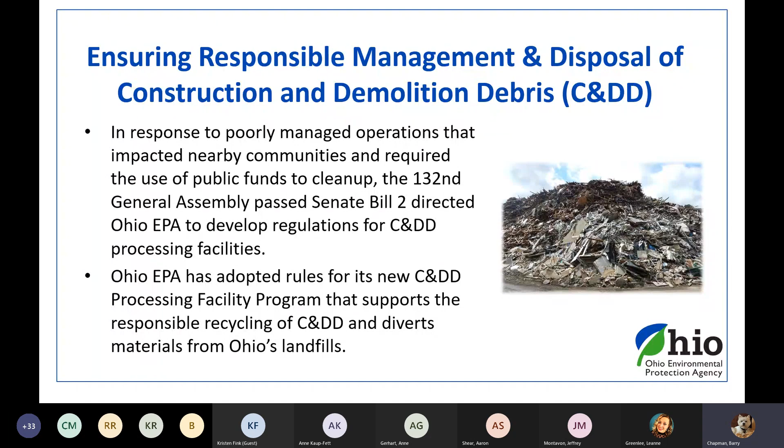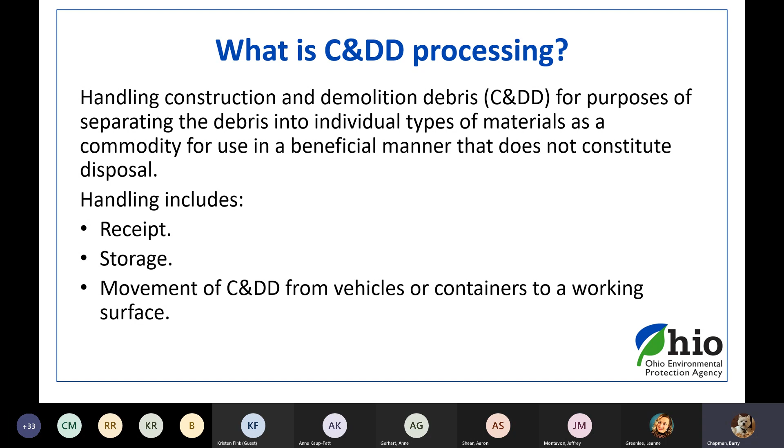So what is C&D processing? We've created this program. What is actually processing? So here's the definition. It's basically handling construction demolition debris to separate it into different types of materials, and we want them to be used in a beneficial manner, basically not disposing of them. So handling is receipt or storage or movement from vehicles or containers to the working surface at the facility.

So we also have the definition of a processing facility, which is, as you see, site, location, tract of land, on and on, that is used for processing, transferring, or recycling of C&D that was generated off premises of the processing facility. So we have some exclusions to these rules, and they do not include a facility that is a licensed solid waste transfer facility, a licensed solid waste landfill, or a licensed C&D landfill where the processing of the mixed C&D happens totally within the unloading zone.

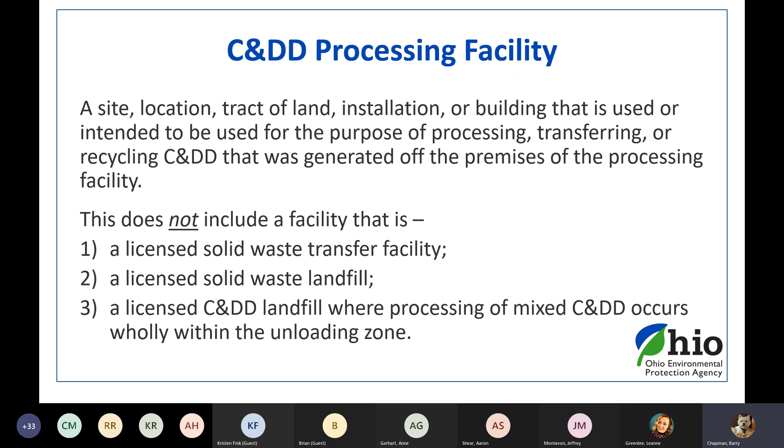There's some other exclusions, which include a processing facility that only has containers that have an aggregate volume of 50 cubic yards or less, and if they don't place it on the working surface or on any equipment used to separate C&D. So this is for like dumpster businesses where they bring in dumpsters of C&D and basically they can kind of transfer them between containers, but they can't put it on the ground. It has to stay in the containers and they have to have less than 50 cubic yards of material to get this exclusion.

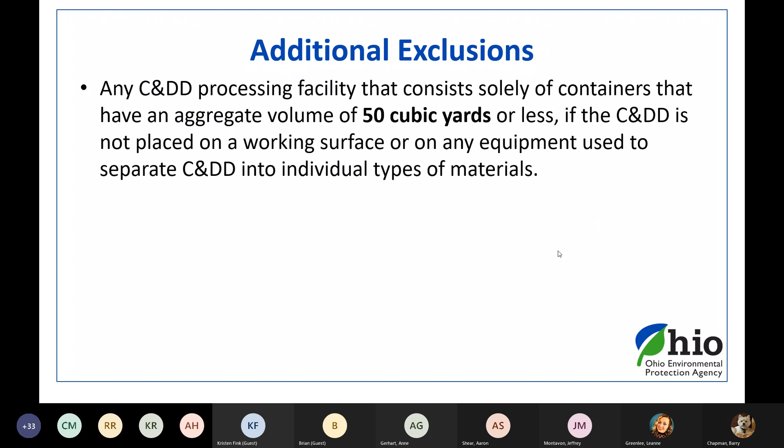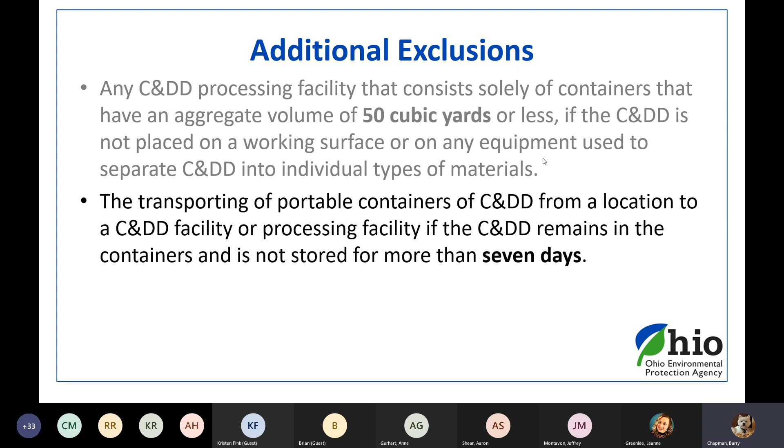Or if they transport these portable containers from a location to the C&D facility or a processing facility, if it stays in the containers and is not stored for longer than 7 days, it's not a regulated C&D processing facility. They don't have to meet both of these exclusions. They can meet one or the other. But if they meet one of these, then they don't have to become a C&D processing facility.

There are two types of C&D processing facilities. There's standalone and co-located. A standalone processing facility is not located at all within the facility boundary of a licensed C&D facility. And these rules became effective April 18th of this year. And we added some new rules to our C&D facility chapter, 3745-400-50 through 60, and they range from siting criteria to construction to operations to closure. So you can go through those rules, and basically it's the beginning of a facility till it closes.

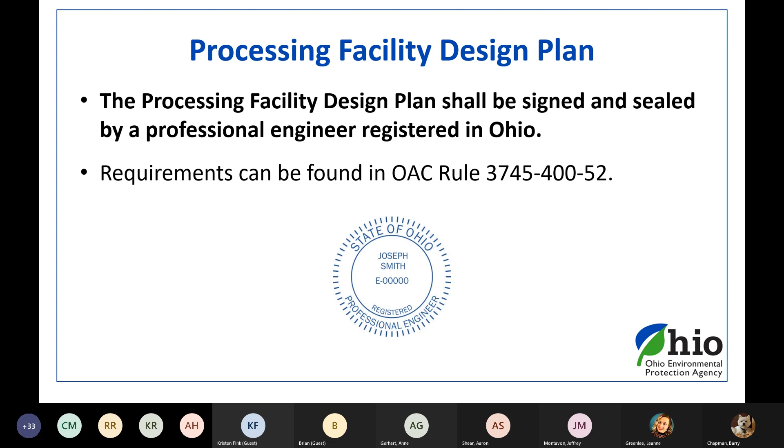So the design plan, like I said, that's part of the PTI application. The design plan has to be signed and sealed by a professional engineer registered in the state of Ohio. And then the requirements for the design plan can be found in Rule 400-52.

So the design plan has a lot of different drawings that are required. One of them is the cover sheet that has general information about the facility, the name of it, where it's located, the owner of the land that it's on, because it's not always the operator who owns the land, and the professional engineer who prepared that plan.

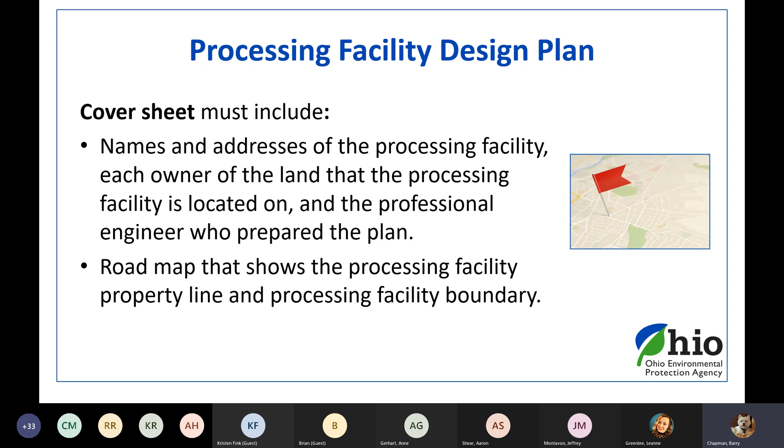And then a general roadmap that shows where the facility is and the property line and the facility boundary. So this is more like a basic general overview of the site, where it is and kind of what it looks like.

So then we have some other drawings of the facility that need to be in the design plan. A couple things to mention here. The property line has to be done by a professional surveyor licensed in Ohio. And then you'll see oil and gas wells within 500 feet of the limits of C&DD processing. If there are oil and gas wells within 500 feet, we need a letter from ODNR explaining those oil and gas wells.

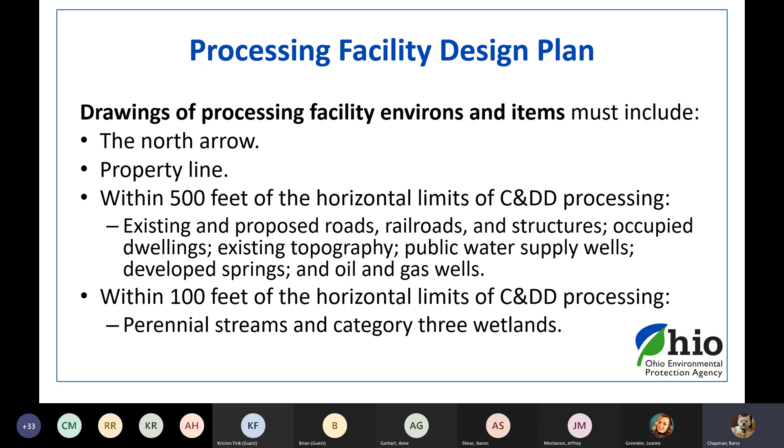So that's one thing to keep in mind when you're preparing an application. We need to know the type, location, depth, and status of the well. And that would have to be a letter from ODNR. So just keep that in mind.

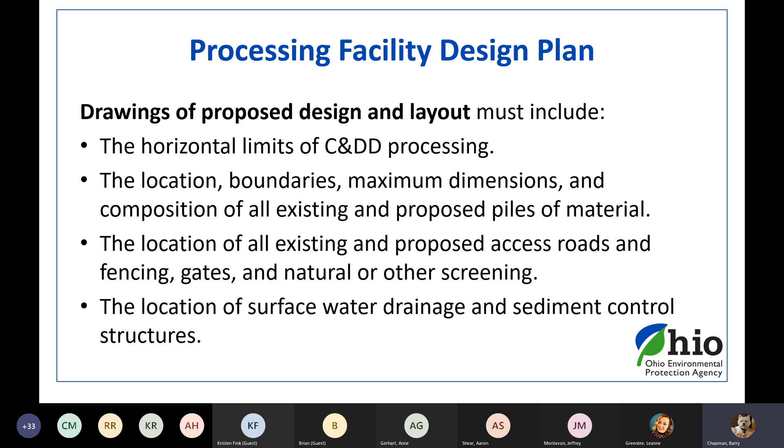And then more drawings. They're listed here. So you need to have all these in the proposed design and layout of the facility. And this is all located in the rules, so you can go look at that. And then there's detailed drawings that have to show everything that's listed here, existing and proposed roads, any surface water drainage and sediment control, any visual barriers, and all the working surfaces at the facility.

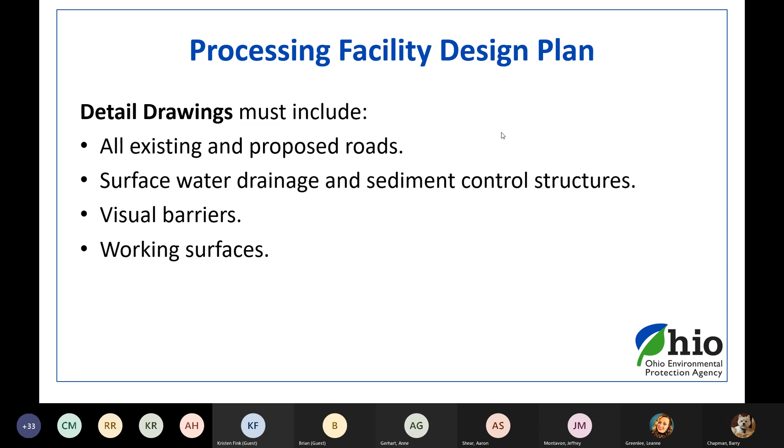There's also design calculations that are required. So we'll need to know the maximum rate of the processing in cubic yards per day. We also need to know the maximum volume of mixed C&DD that may accumulate at any time, and that will also be used for the closure cost estimate for the financial assurance. And then we need to also know calculations for water drainage and any sediment control structures.

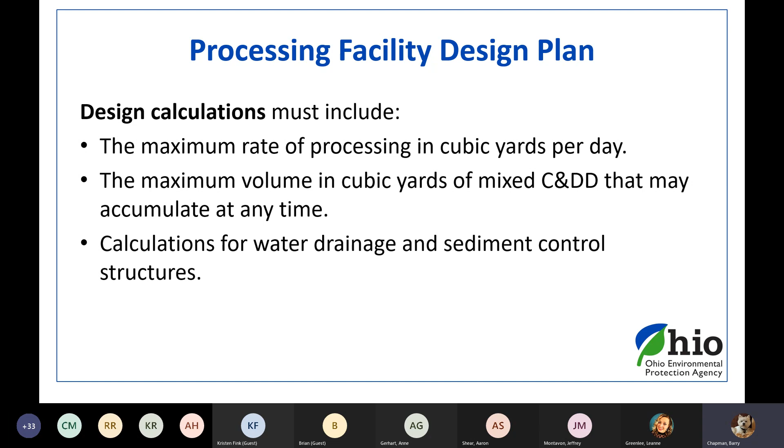So there's also a fire prevention and response plan that needs to be prepared. It has the emergency contact information for the site. There will also be a letter that we need from the local fire department saying that they'll respond to fires. And then guidelines for how the facility is going to handle debris that's burning or at a temperature likely to cause a fire.

The fire prevention and response plan has to be sent to the local fire department so they know kind of what's going on at the site, who to contact, and then they can send the letter back saying that they'll respond to the fires.

So also included in the fire prevention and response plan is how their facility is going to respond to a fire, who they're going to notify, how they're going to operate the fire equipment, how they're going to get out by evacuation routes. And then we need documentation that they have adequate fire control equipment, and any services available that they're going to use for any fires that happen.

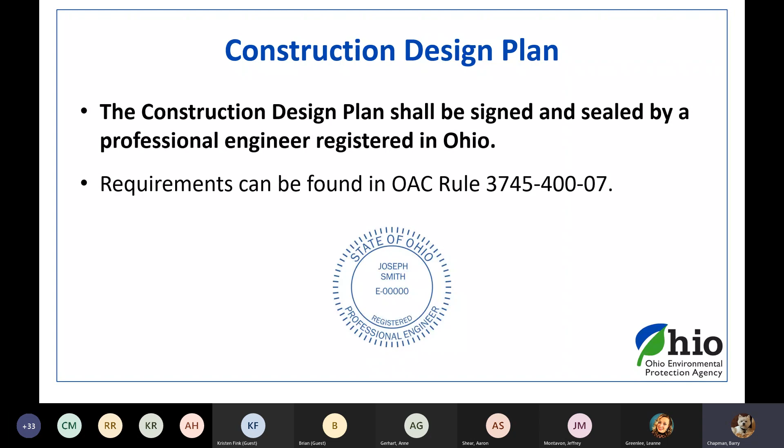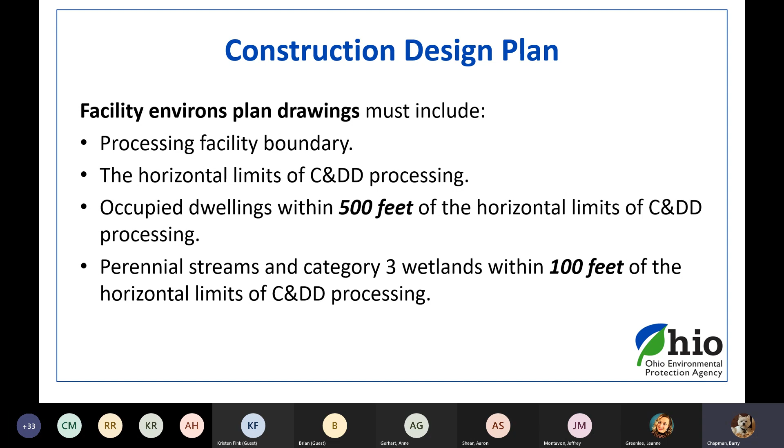So what's in the construction design plan for these co-located facilities? So we want an environs plan drawing that has the facility boundary, those horizontal limits, any occupied dwellings within 500 feet of the horizontal limits of processing, and any perennial streams and Category 3 wetlands within 100 feet of horizontal limits. So these would be identified in the effective license. So you want to make sure that these basically are the siting criteria for these facilities.

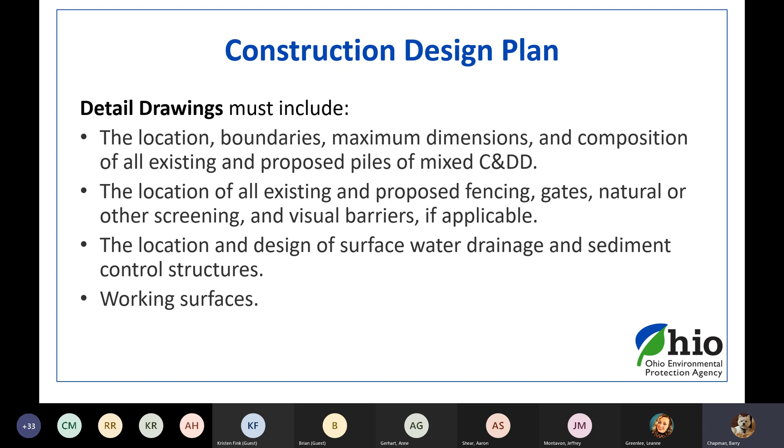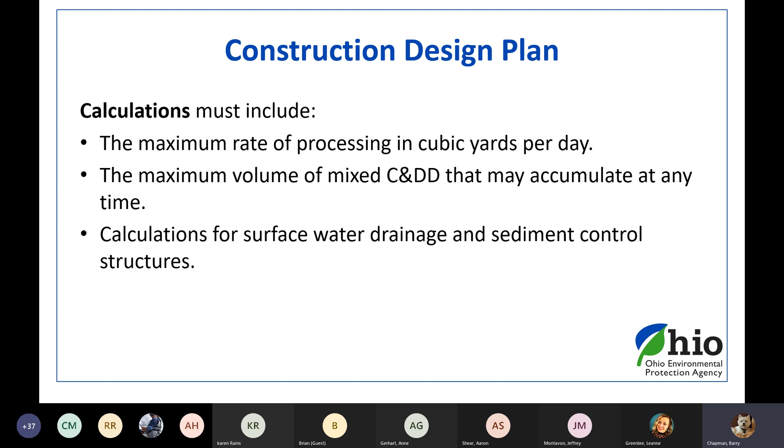So for the financial assurance, again, it has to be funded in an amount not less than the closure cost estimate authorized in the license, and that has to be funded within 30 days of license issuance. So to calculate that cost estimate, it's a little bit different than the standalone facilities. So it's based on the maximum volume of the mixed C&D allowed at the facility that they put in the license.

So we have some different fixed dollar amounts depending on where the mixed C&D is located within the facility. So if you have that maximum volume of mixed C&D within the ALDA of the landfill, then you multiply that maximum volume by $4.25. If the mixed C&D is located outside of the ALDA, but still within the facility, then you multiply that maximum volume by $8.25.

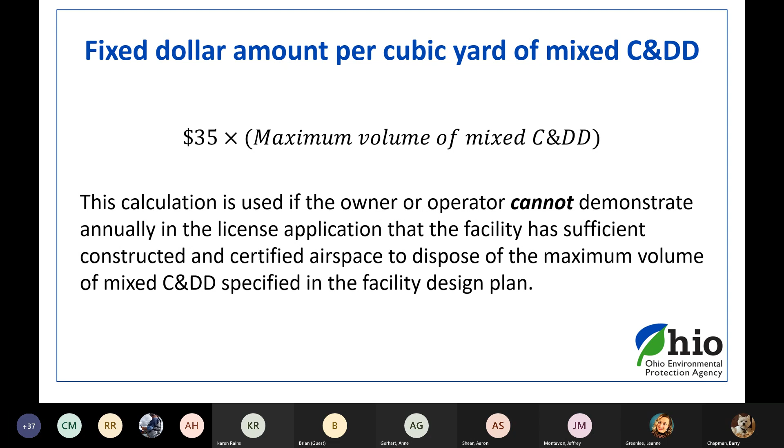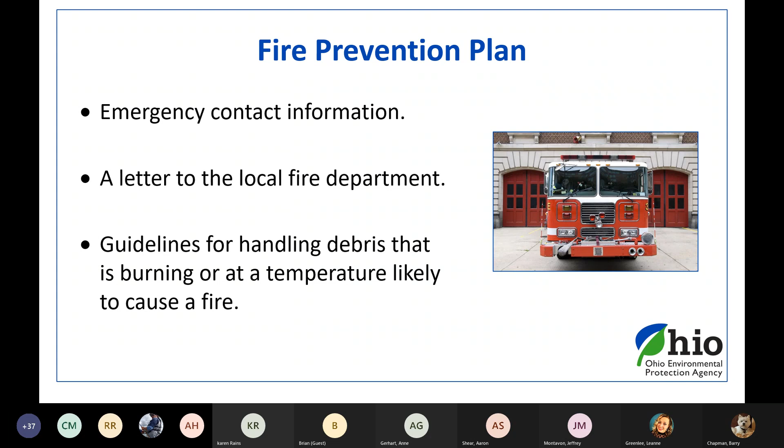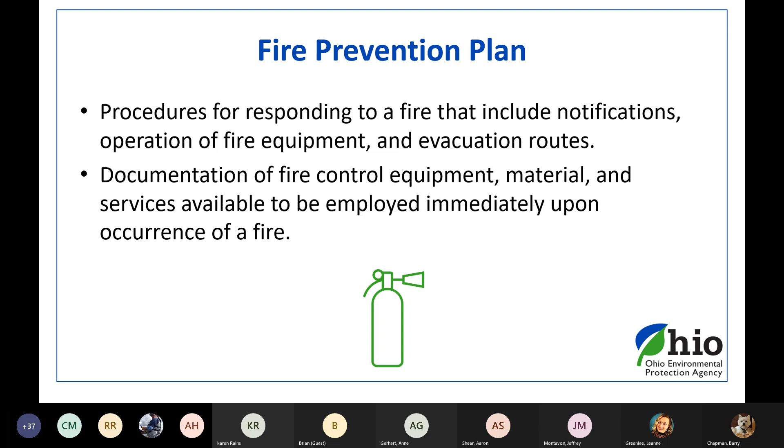So there's also a fire prevention plan, just like for standalone facilities. It includes all this information. It's just like the landfills have to send the letter to the local fire department. It's part of the co-located processing facility license as well. So the plan also, like I said for the standalone facilities, has procedures for responding to a fire, documenting that their fire control equipment is working and not expired, also the maintenance schedules, and then the map of the fire hydrants. So basically the same type of material that is required for those other standalone facilities.

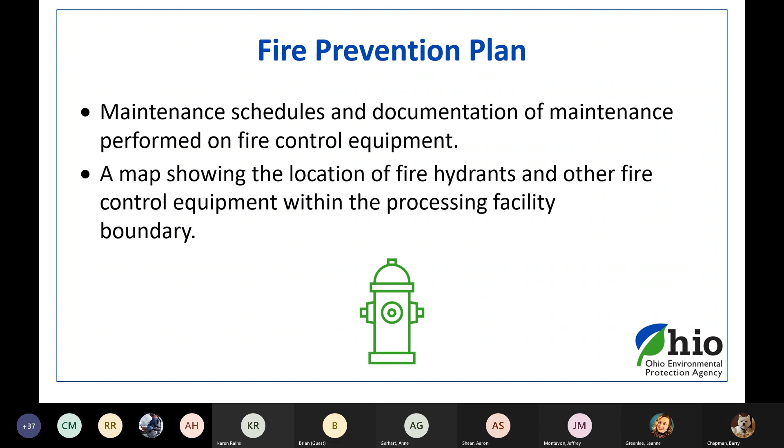So if a facility needs help with filling out their permits, as long as it's not something that's required by a PE, our Office of Compliance Assistance and Pollution Prevention can help out. They provide free and confidential assistance. So if you contact them, they can help you if you have questions about filling out the permit or license. And they can answer your questions, or get you in touch with somebody who can. And they can also help with your permits and other types of authorizations that you might need.

Everything I went over was for Division of Materials and Waste Management. These facilities may also require stormwater permits through the Division of Surface Water. They might also need fugitive dust permits or any other kind of air permits. Those are for Division of Air Pollution Control. So there's all different types of authorization from different divisions that may be required.